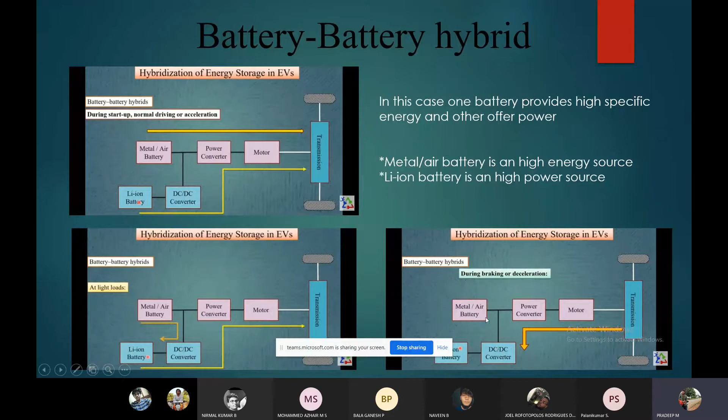Next, during deceleration, the metal battery is not rechargeable or not accepting power. The electrical motor and generator transfer kinetic energy into electricity to charge the high power energy source via a DC-DC converter. So from the transmission, it can be charged through the lithium ion battery through a DC-DC converter, but we can't charge the metal air battery in a deceleration condition.

Next, we are going to see the battery ultra capacitor hybrid. There is a combination of a battery and the ultra capacitor, and the ultra capacitor is a high power energy source. It can offer high charge and discharging power, but its energy density is extremely low, and the ultra capacitor has to work together with electrical batteries.

In addition, a two quadrant DC-DC converter connects the battery and the ultra capacitor source. The lithium ion battery is the primary energy source, while the peak power is delivered by the ultra capacitor source. The ultra capacitor source is recharged during regenerative braking from the lithium ion battery.

In acceleration mode, both are discharged to the motor, and it transmits to the wheel. In a light load condition, the lithium ion battery will discharge to the motor and also discharge or charge to the ultra capacitor.

In a regenerating mode, it will charge the high power energy source, which is the ultra capacitor.

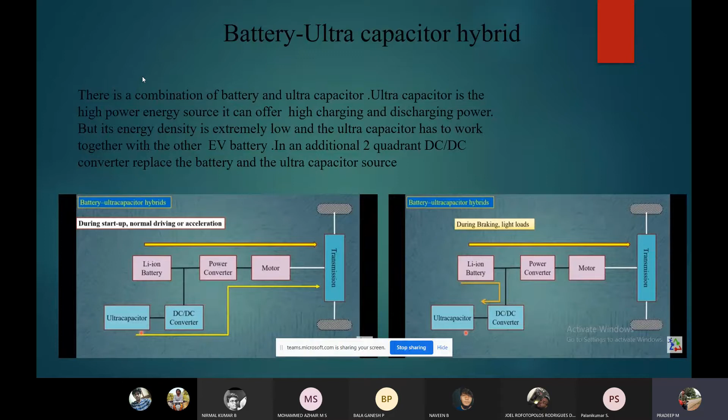Next, fuel cell battery hybrid system. It can offer outstanding specific energy, and it suffers from lower specific power, and has the incapability of accepting regenerating energy.

In the case of a fuel cell electric vehicle, it is generally propelled by the fuel cell battery hybrid storage system, in which the fuel cell stacks and the battery work together for efficient regenerative braking and high accelerating power. The battery operates in an SOC window of 40% to 70% in the fuel cell battery hybrid collaboration, in which the battery can be purposely selected to compensate for the shortcomings of the fuel cell.

In fuel cell systems there are three types: first, proton exchange nickel metal hydride battery, and proton exchange fuel cell lithium hybrid. These are typical choices of battery having high specific power and rapid rechargeable capability. The ultra capacitor should be improved to such a level for specific high energy.

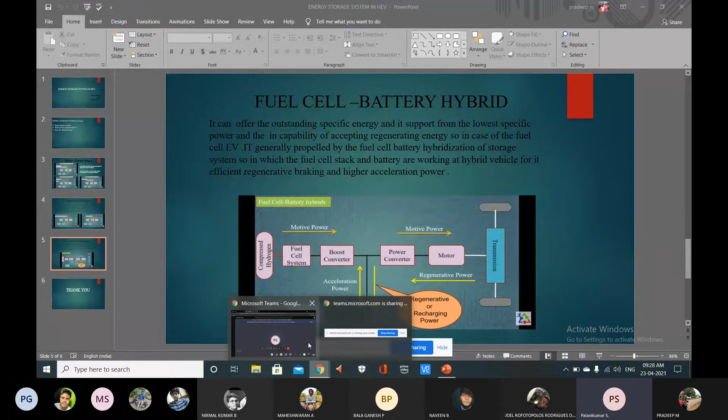Okay, Pradeep. Nice presentation. Thank you.

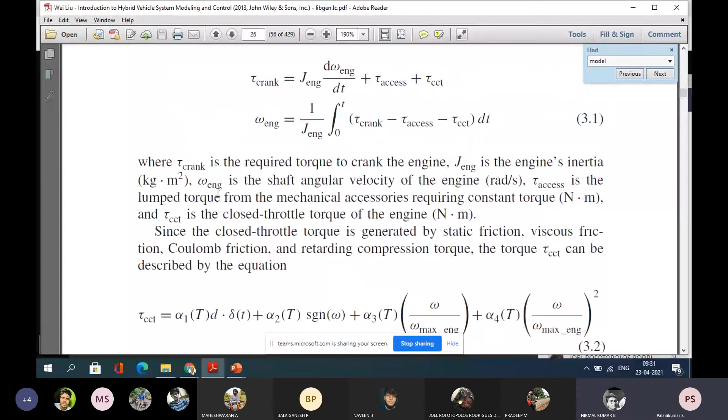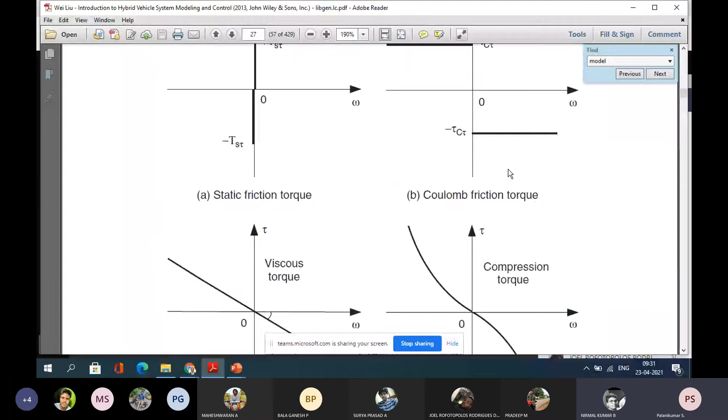Okay, so first, completely internal combustion engine. What is an internal combustion engine? Suppose a crankshaft. The engine is there, no? Gasoline engine. Yes. For each gasoline engine, what is the corresponding mathematical equation? They'll explain. And slowly they'll go to the characteristics, how those characteristics can be represented using equations.

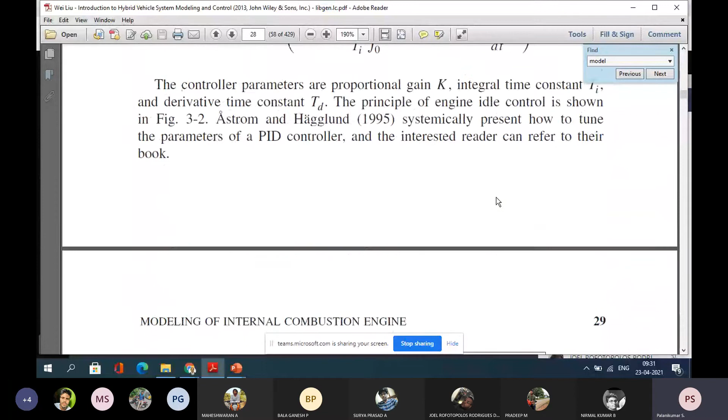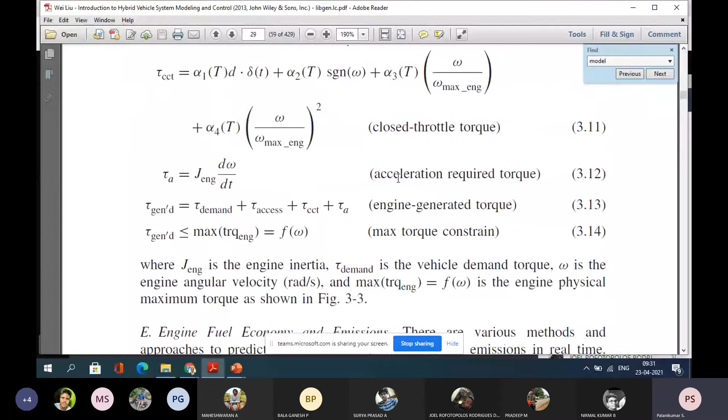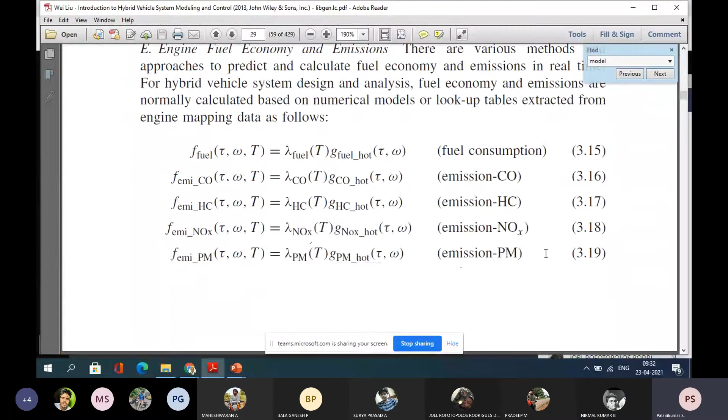Then they'll start with the engine off, and when the engine is in idle condition, when the PID controller is present. So they have generated engine idle and speed control, that is the speed control principle. And what are all the equations? Closed throttle torque, acceleration required torque, everything, finally a mathematical model. And fuel economy: finally how to calculate the fuel consumption, emission of hydrocarbon, emission of nitrogen oxides. These are all the things they'll take, and finally they'll have a fuel consumption and emission calculation loop.

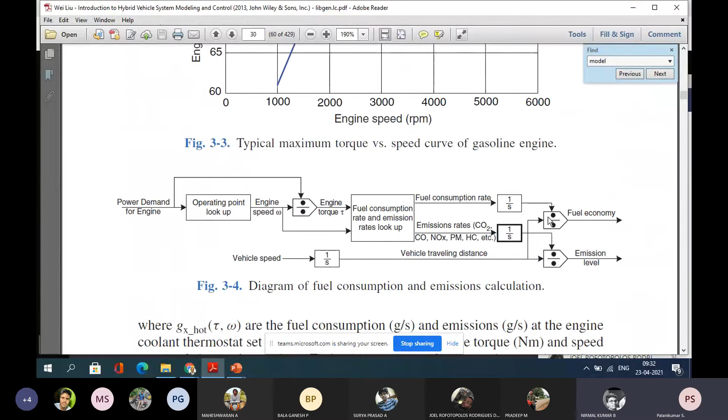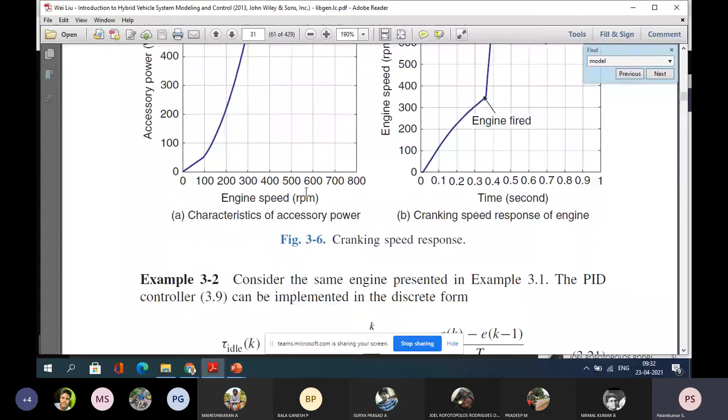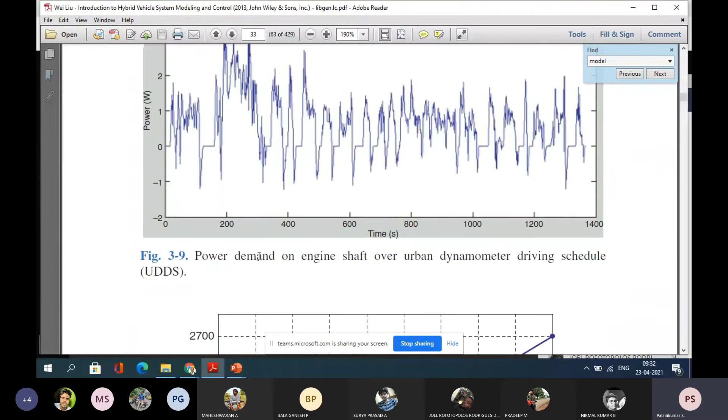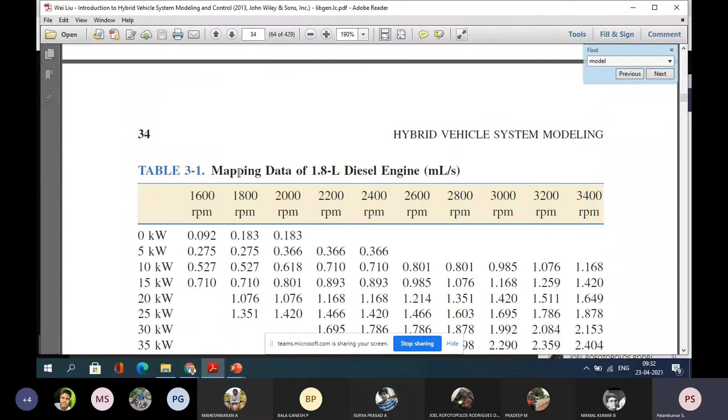Then they did one problem. After that, how engine cranking can be modeled. For that, how the engine speed and time is taken, and they have done another problem. Likewise, electric motor: how the required power is found. First, they'll have a driving schedule of a particular one, as well as engine operating power. After that, they converted it. They have a data mapping of a 1.8 liter diesel engine with how much RPM, how much kilowatt are required.

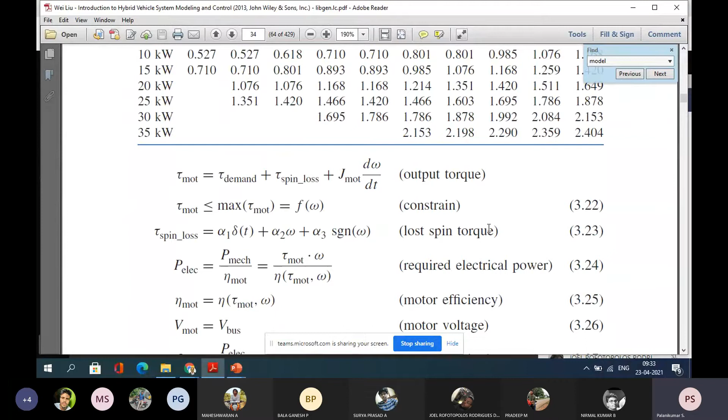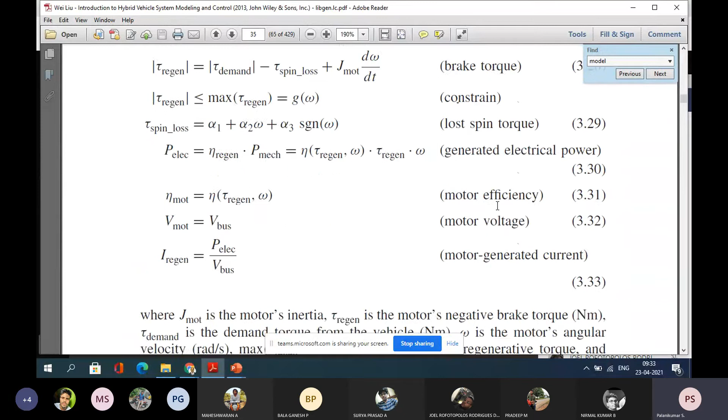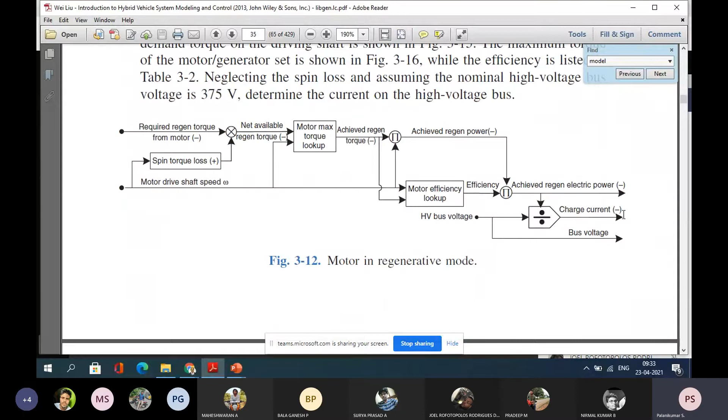So from that, motor torque, output torque, they'll convert to mathematical modeling constraints; motor efficiency, motor voltage, everything they'll convert to equations. Then they'll implement the equations in the motor and propulsion mode. Likewise brake torque: motor efficiency, motor voltage, how to calculate, and they have done it on a small motor in regenerative mode. During regenerative mode, how we can predict and get the exact value of power. How much torque is given, how much drive shaft speed, everything taken. Finally, how much will be the bus voltage, how much will be the charging current, so they can make it a closed loop.

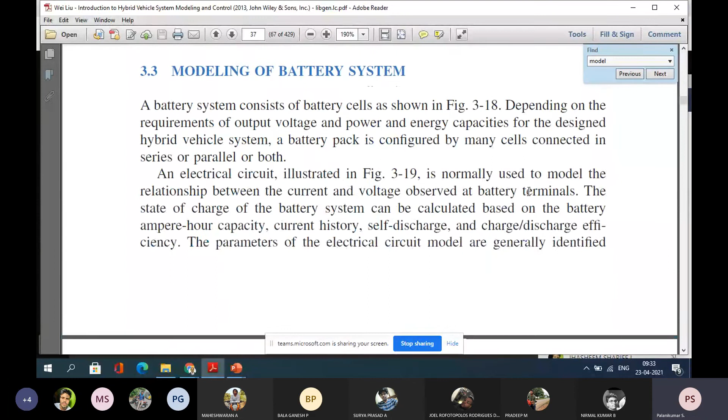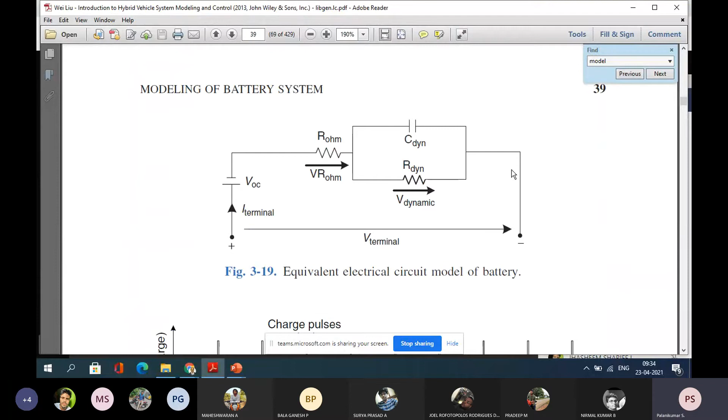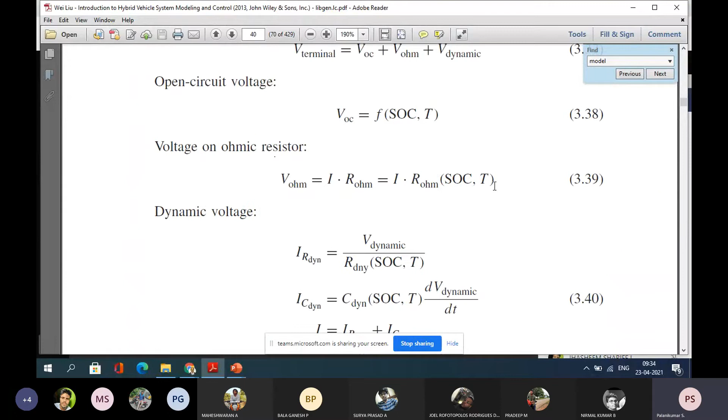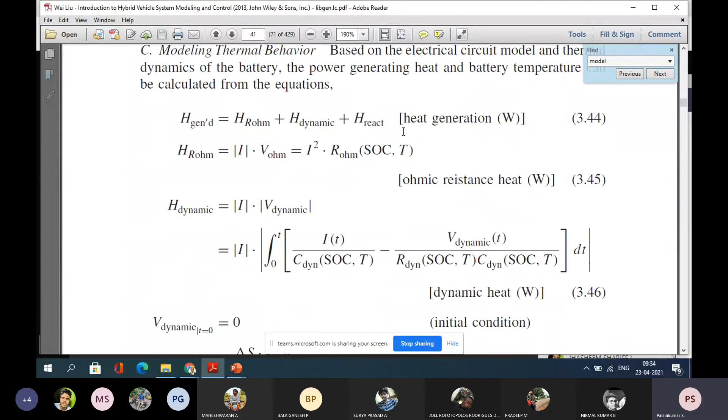Then they will have drive cycle and battery system modeling. For each motor generator set, how much Newton meter, what efficiency will be generated. How a battery can be modeled, charge pulses, charging and discharging; they have given a complete model and equations in terms of terminal voltage, open circuit voltage, ohmic resistor voltage, dynamic voltage. Everything mathematical modeling they have done, very good, from page number 25 to 60, and thermal behavior of the battery. Only thing is you have to understand. So I think 2-3 hours of extensive study and preparing slides is very important.

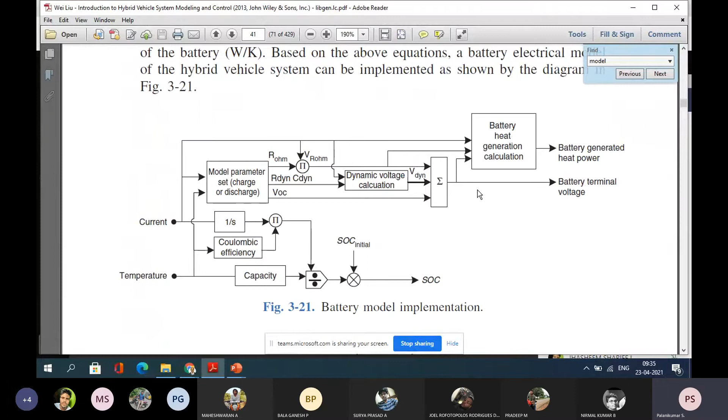Finally, battery model. If current and temperature are given, how much is the battery generated heat power, battery terminal voltage, what is the state of charge? By providing these two pieces of information, how much current I need and the present temperature, I can predict how much heat will be generated in a battery, the battery terminal voltage, and the state of charge. They have arranged all the mathematical model equations so I can get the final output. This is what is called battery model implementation. I think you are able to understand.

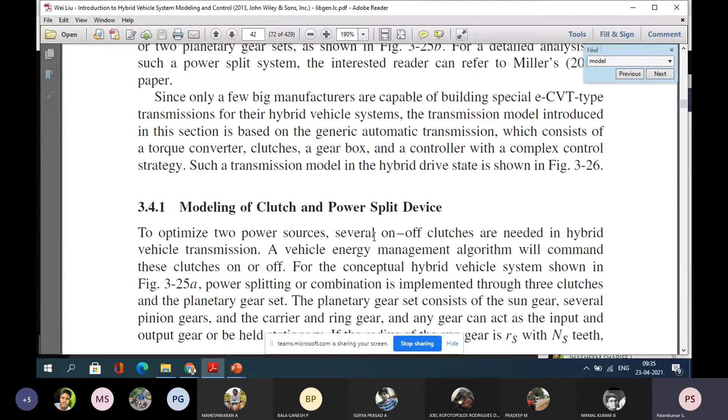Yes, sir. Okay, so likewise they have given examples, and transmission system, modeling of a transmission system. From tractive force generation to how, using a clutch and power split device, we can do that at different percentages of SOC. And they are governed by the equations. What's the equation?

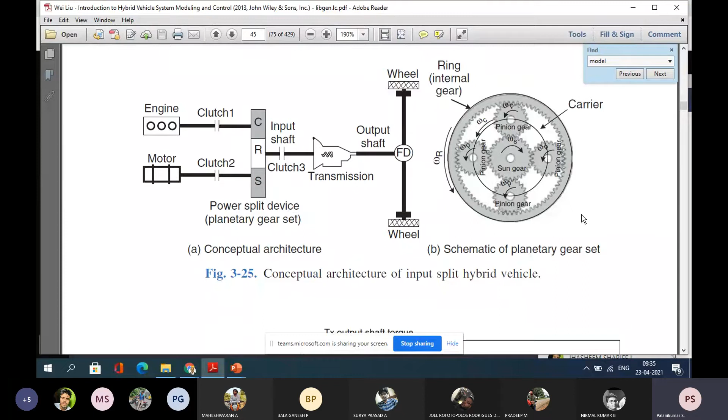And how is the conceptual architecture, how the power of engine and motor is given using a clutch arrangement, and how the transmission occurs finally in a differential gear, final drive gear, and how the planetary gear is working. And finally, the way they have put it in all the mathematical equations, they place it here, and automatic transmission hybrid drive states.

Clutch control, engine power, engine speed, engine inertia, motor power, motor speed, motor inertia is given. Finally, if I'm given this detail, everything is processed, and I will get how much is the output shaft speed, how much is the output shaft torque, and how much is the output inertia. So I can get it.

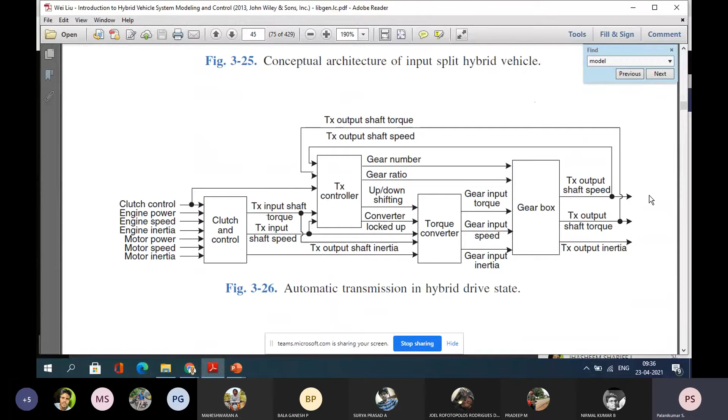Because as a result of the mathematical model, we are going to implement it in simulation. If you want to implement simulation, I should create a Simulink diagram. So each clutch control power was earlier mathematically modeled, likewise torque, shaft speed. Everything is mathematically modeled, and finally I will get three outputs: how much is the speed, how much is the torque, how much is the output inertia. It is given very nicely.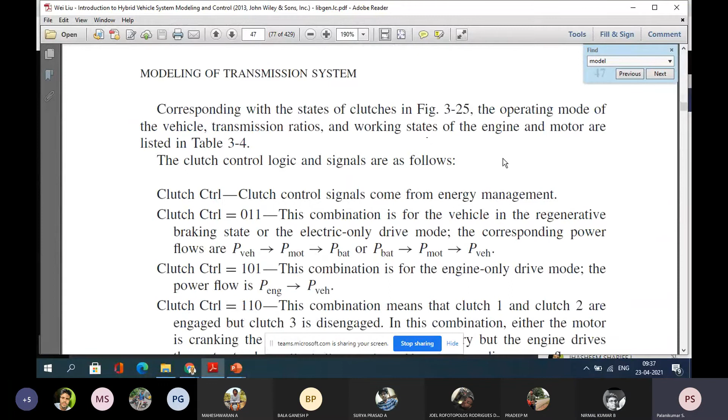I think this book also I have uploaded. So clutch control, how it is happening, how the power flow is happening, everything is very neatly described. After that, individually, motor speed, motor torque, motor inertia are given. After that, what will happen to shaft speed input, what will happen to engine shaft speed. So this is the model diagram.

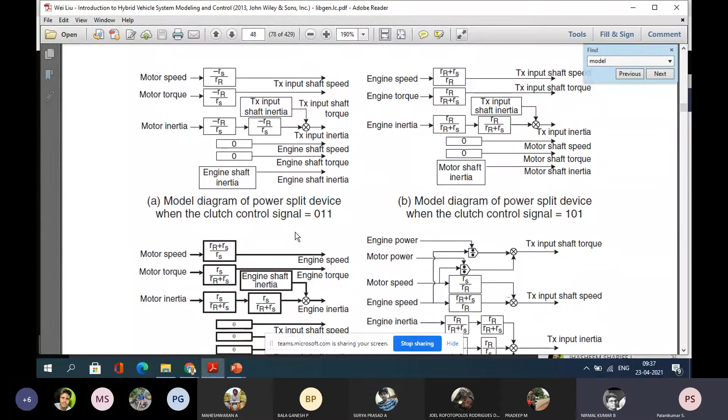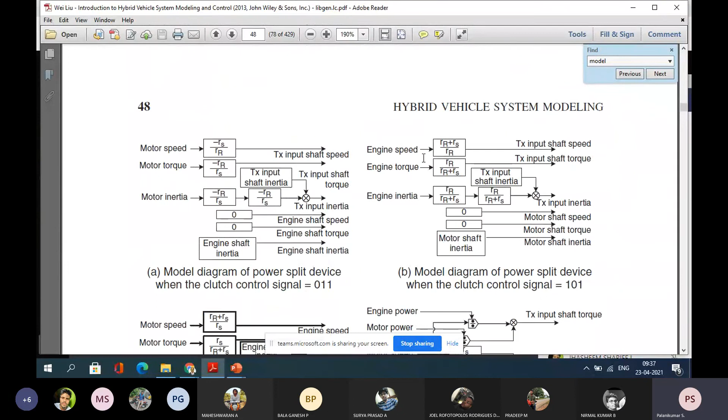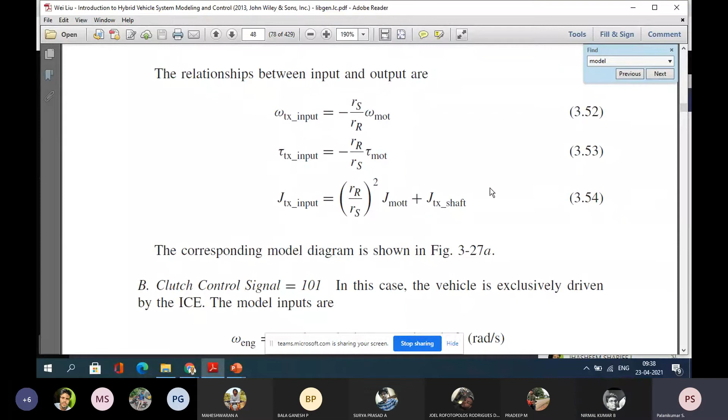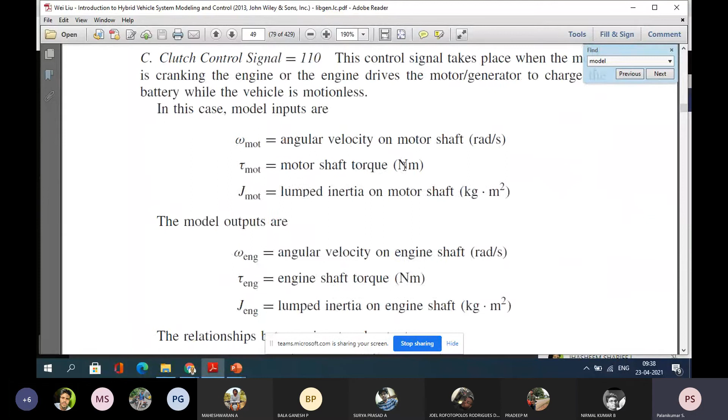Of clutch control signal 011, here is the 011 clutch control, 101 clutch control. We are going to name it and describe the operation. It is completely in the program, and that is AICTE conducted. That program mainly is going to create engineers with this knowledge, after the fundamentals: starting from engine and motor, and when coupling this power in a powertrain using a clutch arrangement, how it reaches the vehicle as a tractive force. They are going to elaborate on that. Very good material is available.

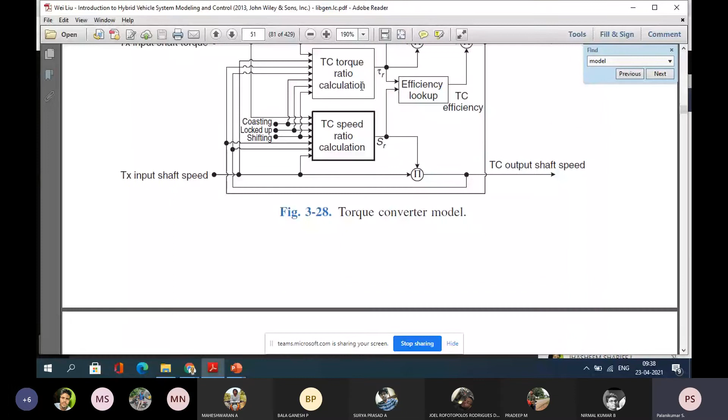So completely, whatever the factors, everything has a formula. The torque converter model also is there. By the input given, I can get the shaft torque and shaft speed, considering the inertia of the vehicle, how much will be the output shaft torque and output shaft speed. In between, I will do the torque ratio calculation and speed ratio calculation. Finally, added with the efficiency, I will get the required amount. So this is how I'm designing.

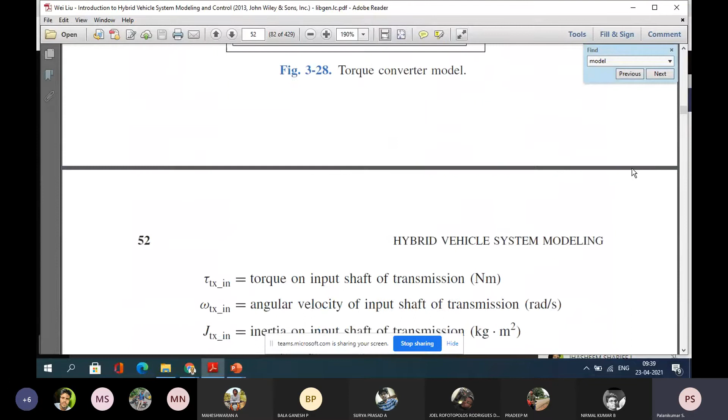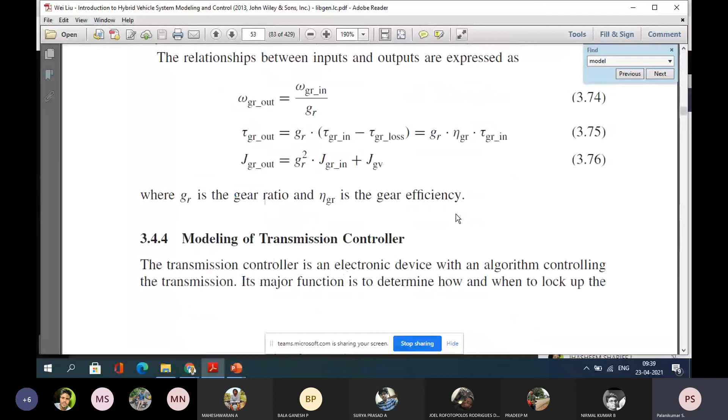After this, the digital output is converted to analog and given as a signal to the concerned engine and concerned motor, so I can get the required amount of power. A complete mathematical model and its notations, everything is given. Even the gearbox is modeled: modeling of gearbox, how to do that, modeling of transmission controller, how to do that. Everything is very elaborately given.

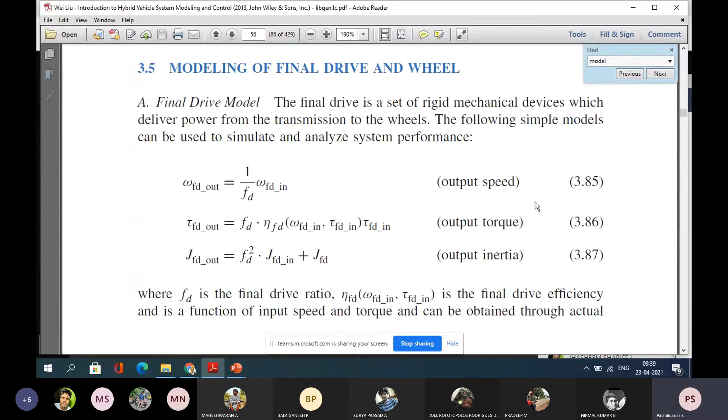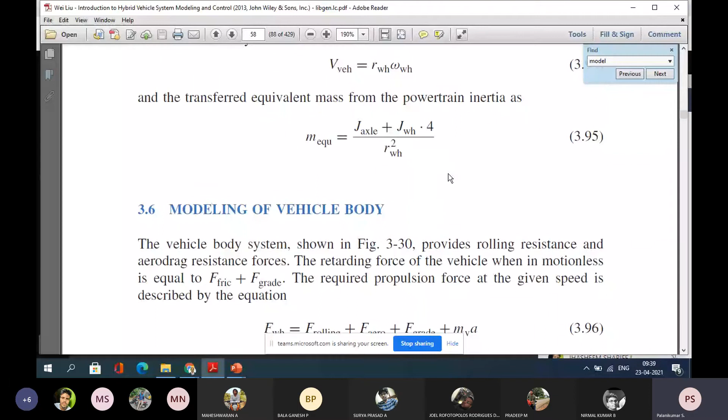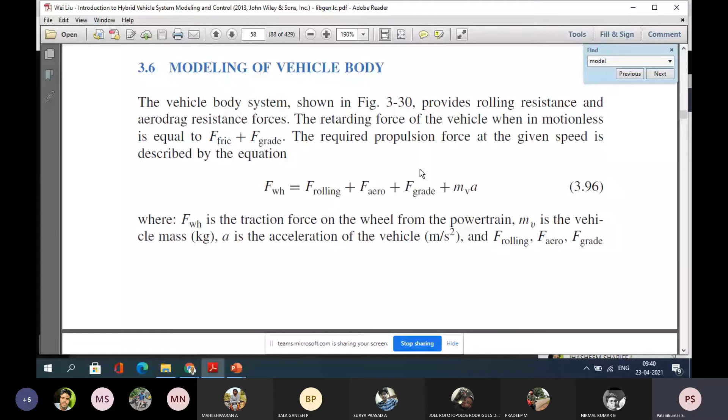At least, leave the mechanical part. You can concentrate on motor, battery, and final powertrain, final drive and wheel, and you can explain how this mathematical modeling is helping to understand and simulate. Mainly we go for mathematical modeling because before going for any prototype, we want to know whether the design parameters are working properly and I'm getting the desired output. That is a very important reason why we go for simulation. Simulation software is actually a very important gift.

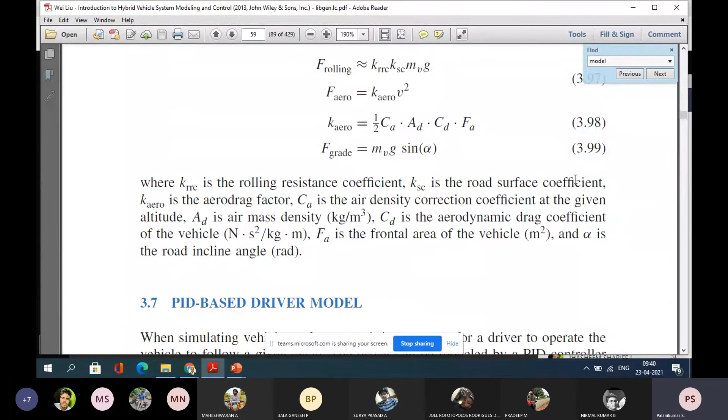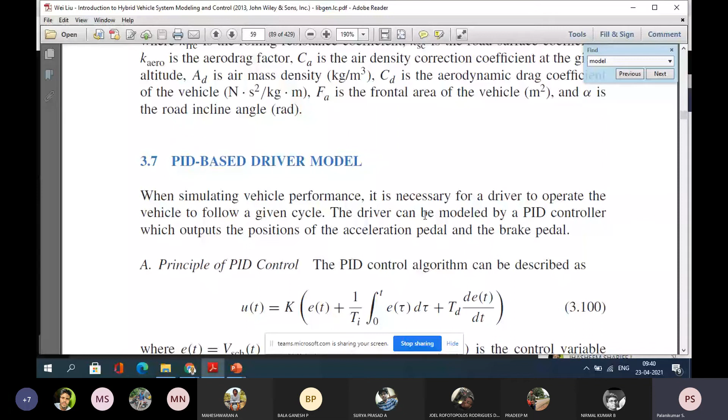Otherwise, even if you have done everything on paper, calculations and all, finally we have to go for a prototype. But obviously here also, after getting simulation results, we have to go for a prototype, because as I explained one day, it is complementary only. Some of the major issues arise only in the practical case, which we neglect because they cannot be characterized in a mathematical equation. Some things can occur only in the real practical system. Other than that, the remaining we can predict. So obviously any simulation output, any mathematical outcome, is complementary only.

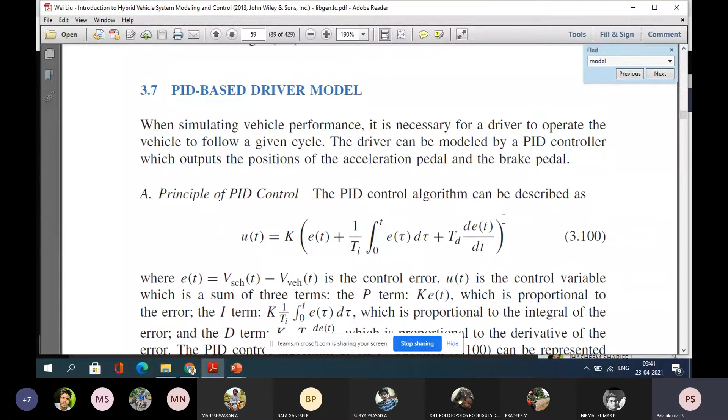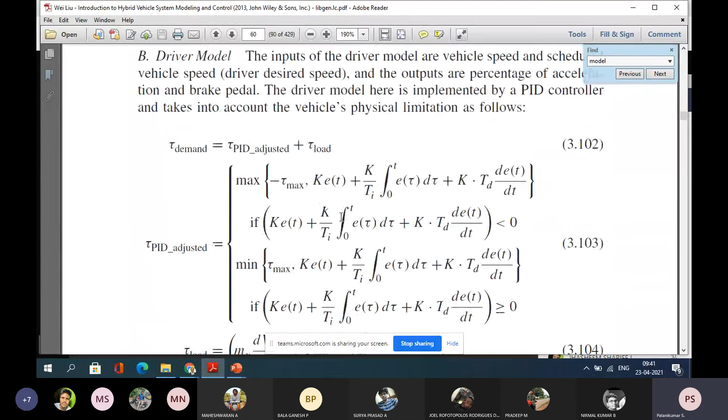It is complementary to the real-time models only. So that way, if you take that, you implement PID control finally as a driver. So how is it really implemented? Finally they'll come out with how much is the demand, how much is adjusted, and how much is the braking power, how much is the acceleration power, everything you will finally come to know.

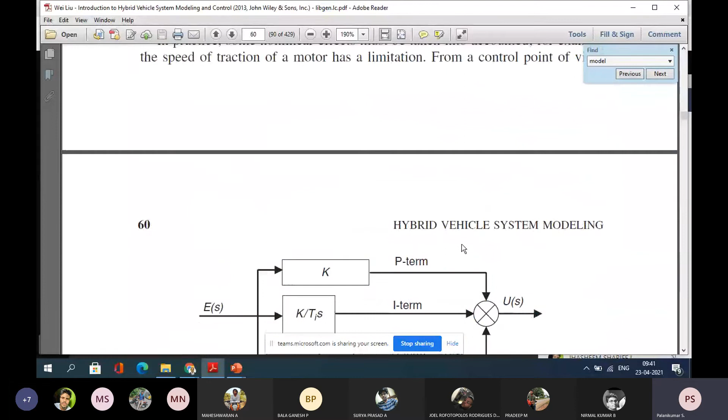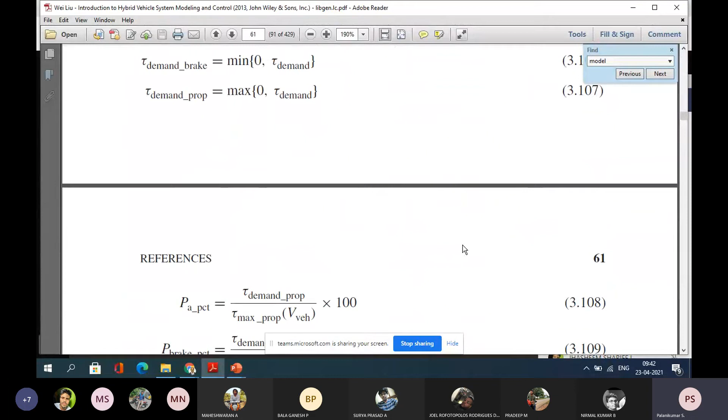So by simply providing the details, starting from the engine parameters and motor parameters, battery parameters, working condition and drive pattern, everything, if I am able to feed it to the system, finally I will get a desired output. How much is the shaft speed, how much is the shaft torque, how much is the inertia torque, inertia speed to overcome that, and how much is the tractive force that can be generated. So in terms of numerical values you are able to get, then I can go for real-time fabrication of these things. So that is the way the mathematical modeling can be converted.

Yes, yes, nothing, sir. Hello.

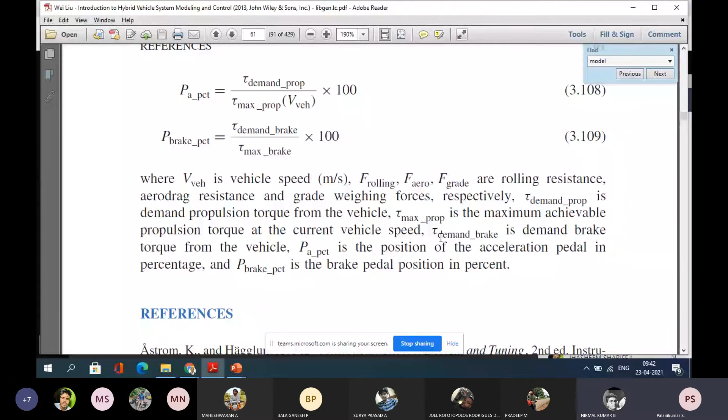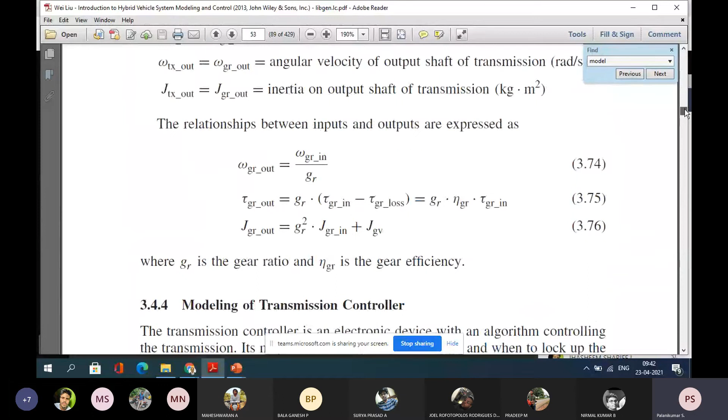I think that's really the challenging thing. I think this is somewhat advanced, I can only say. So the only thing is, slowly and gradually you have to start understanding. Have you worked on any Simulink development using MATLAB? I think you may not have worked on it. Maybe only for power electronic circuits you may have used Simulink, but this is to develop a Simulink block.

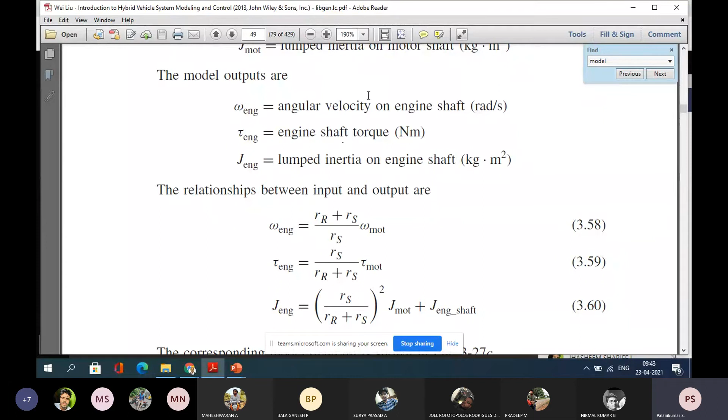There everything is readily available. Suppose I have a device, suppose a power source is there, the only thing I have to do is drag it and it will come and paste. If I double click that, I am able to set the input. It will show all the input parameters and the output of the block. That's nothing but mathematical equations. But here, after developing this mathematical equation, we are going to implement the same in the blocks and we are going to save them.

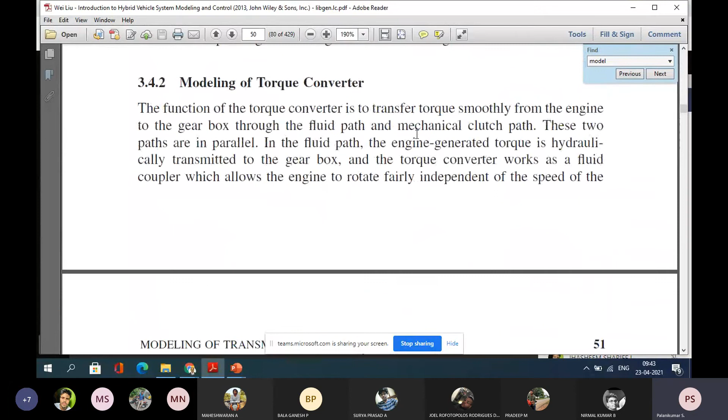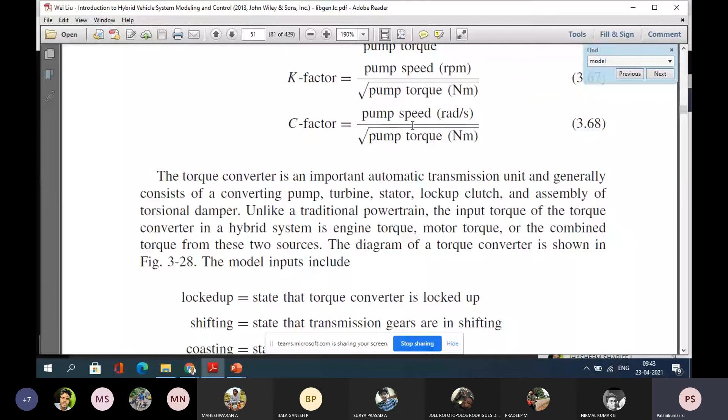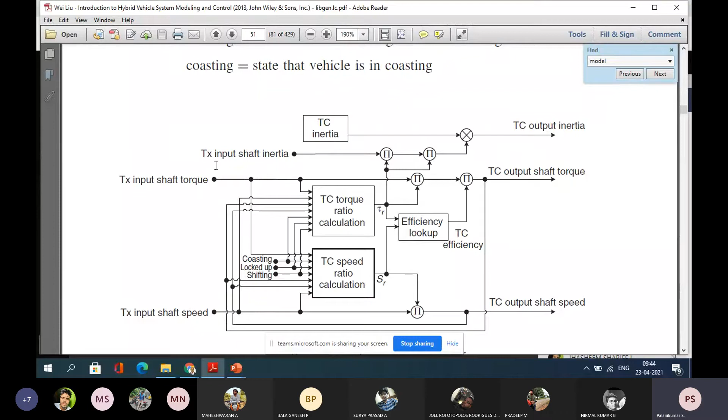There is Scilab, I think you may have that software, Scilab, SCI. It is similar to MATLAB, but it permits creating such a mathematical model, and we can put it in a block like that, a box in which if I double click, automatically it will show what the input is and what the output is. Likewise I have summation points and added points, everything is available. Apart from that, these things only I have to create, and once I have created and stored them and made a Simulink diagram, by providing this input I can get an output. So after the final implementation, I can get what I want.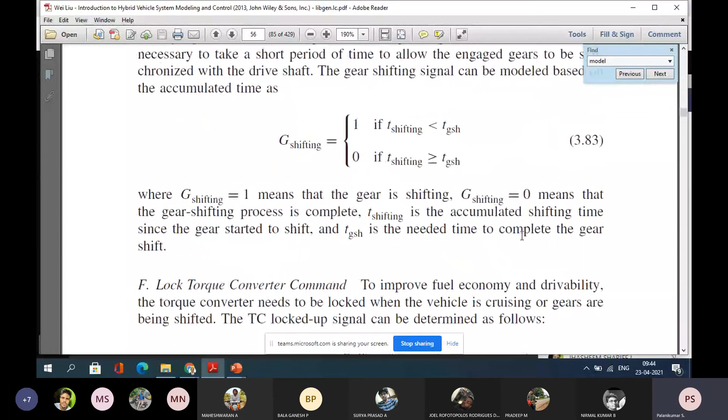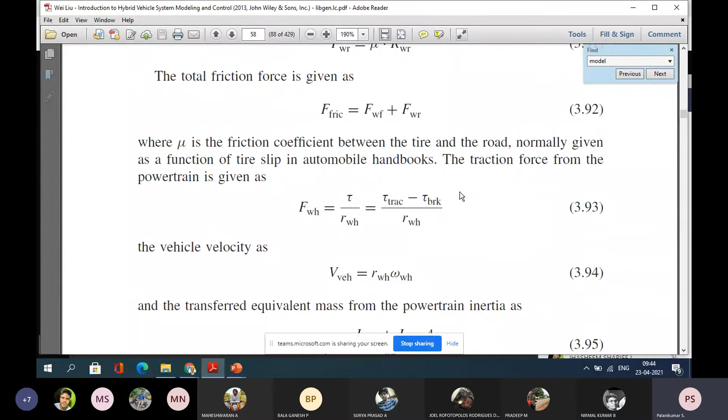Is it possible, Nirmal? Can you work on this and present? Yes, sir. I will try, sir. At least some 20 slides. You can try. Suppose you are not able to understand the engine part, the crank cycle, how much mechanical power is developed, leave that, and we can concentrate only on motor, battery, and power drive, and finally how the final implementation looks. Okay, sir.

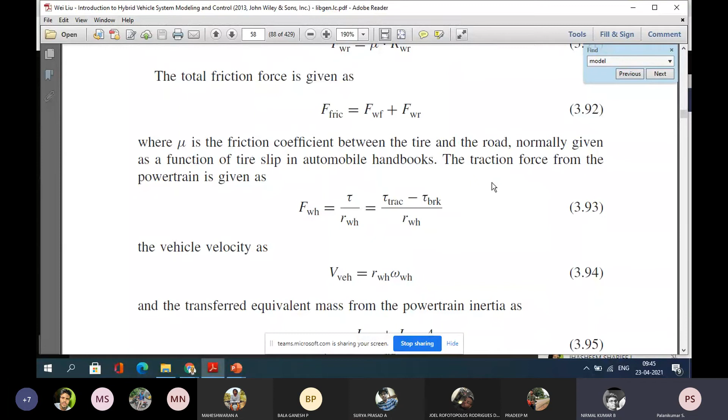Okay. Any other clarification? Others? Any clarification? Okay.

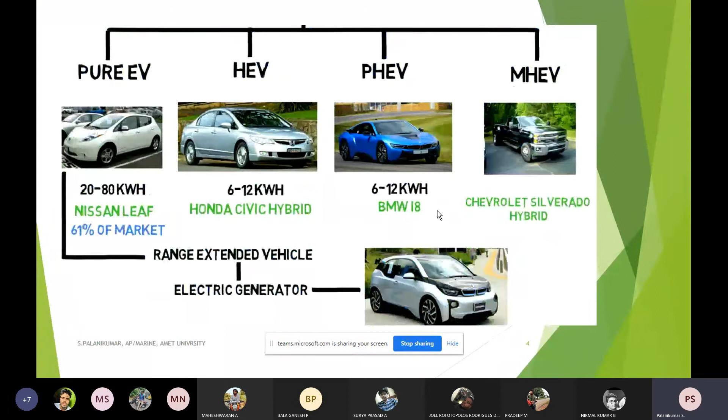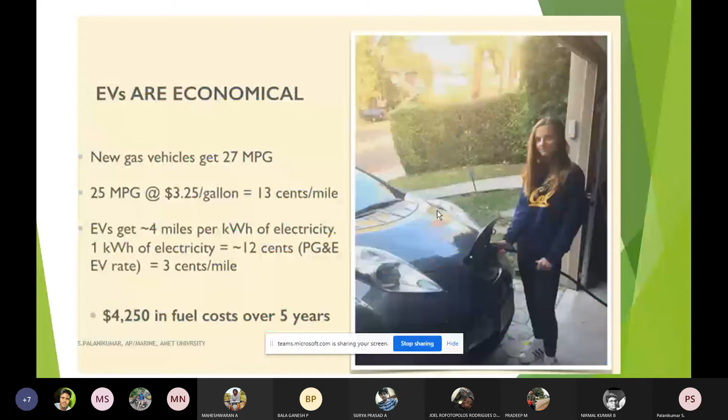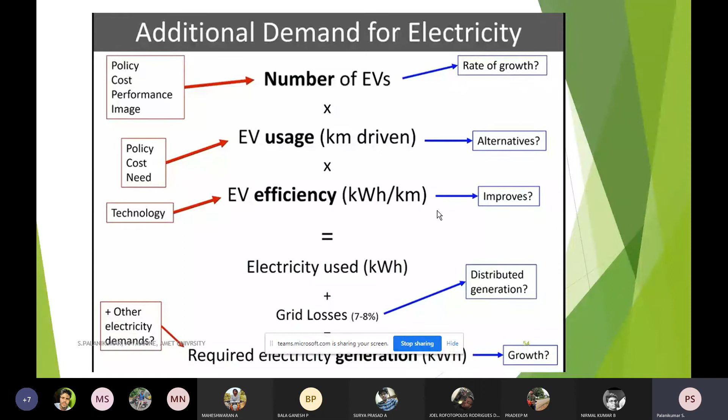So yesterday, regarding retrofitting, we have seen, I think Maheshwaran presented something. Apart from that, these are all the basic concepts, you know that, and battery pack and all. I think these types of issues we can also take when going for retrofitting. How many EVs or HEVs and their usage? How much electricity will be needed? Additionally, we can discuss charging and peak demand power, constraints on the local transformer, how it will be affected.

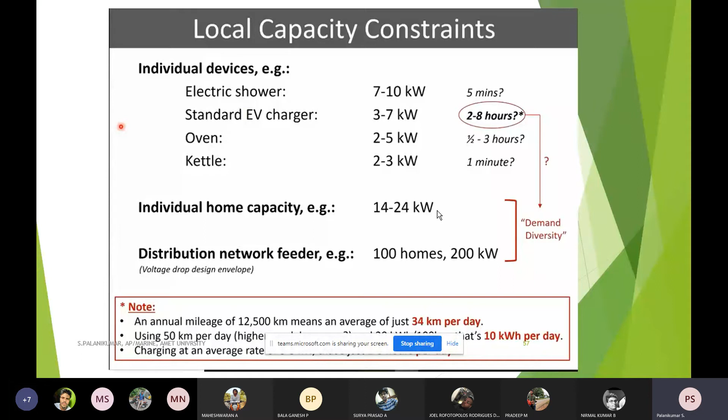After that, mainly when we talk about EV or HEV versus petrol, how the fuel economy is improved along with emission control. I think I have explained these also, so you can include that in your presentation. Finally, even when going for a hybrid electric vehicle, we use electricity for charging. That electricity in turn is produced in generating stations using 70 percent fossil fuels. Maybe only 30 to 40 percent from other power plants. In India now, 60 to 70 percent of electricity is produced using thermal power plants, mainly by burning coal.

Remaining only hydel. Then we can go for other energy sources: diesel power plant, and obviously nuclear power plant. Then we go on for renewable energy sources such as wind farms and PV panels. So of how much electricity I'm using for charging my battery, 70 percent is going to come

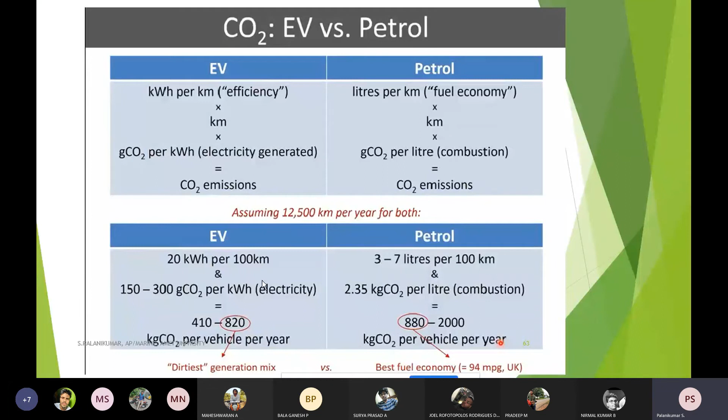So this is a very important calculation or slide, assuming 12,500 kilometers traveled by a vehicle, if it is pure petrol or a pure electric vehicle. I think you can take this also. So, especially retrofitting as a solution in the Indian context, we have already seen that.

If you look closely, compared to India, other nations spend only a very small amount of their per capita income on fuel. As you are aware, India is one of the Asian countries selling fuel at a very high rate. In neighboring countries like Sri Lanka, Myanmar, and even Malaysia, Singapore, even Pakistan, we can take.

The fuel cost there is very low, half of our price only. But the Indian government puts taxes. So if you consider fuel price relative to per capita income, in India it is very high. So it is not only to contribute to the CO2 emission cut, we also have to decrease the fuel price burden on per capita income. For that also, retrofitting technology is very useful.

It addresses customers' needs: how much they want to cut down, and the financial goal. Mainly it has a financial goal and performance sustainability. The same way, it will give you fuel economy and address vehicle end of life. Conventional vehicles running at the end of their life show very poor performance and very bad fuel economy. In that case we can convert them, and it also contributes to society's needs.

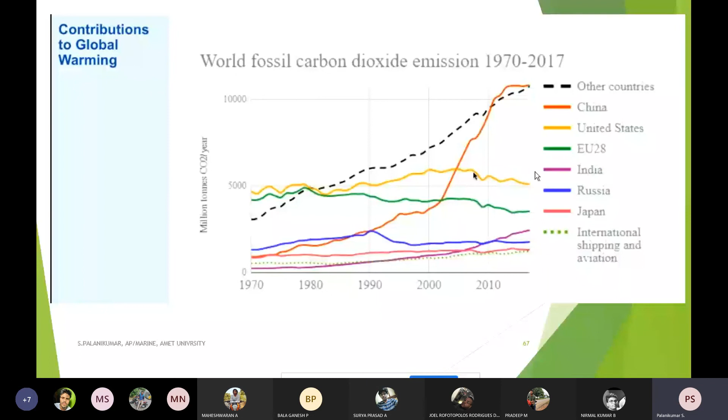So one study states why Delhi, Mumbai, places like that, are having more deaths, casualties, these days because of its outdoor air pollution, so that can cause virus transmission very fast and actively. Maybe that's the reason for mutation also, why the mutation happens in Bengal, triple mutated, they're telling. So maybe due to the pollution, in order to survive, the virus itself is getting mutated.

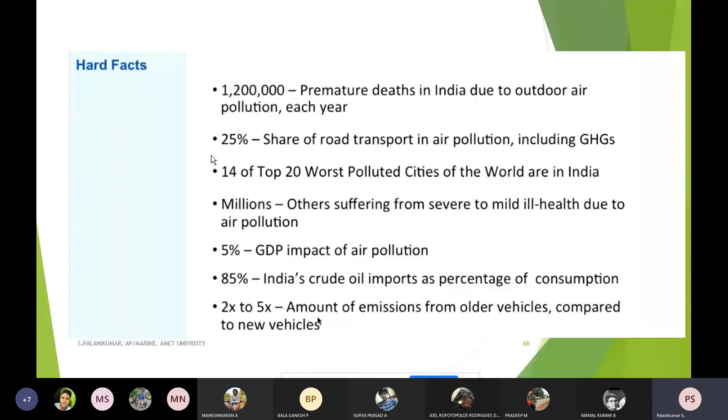As far as the retrofitting technology, as I already told, there are two different ways: hybrid electrical and full electric vehicle. This retrofitting technology is a recognized one, and it is regulated by the AIS, AIS-123 part 1 and 2. In hybrid electrical vehicle, mainly torque assisted system, starting from torque assisted system up to 70%, 80% of hybridization is there.

Whereas if you want to convert an existing Maruti 800 or Alto 800 vehicle, we can able to convert it to full electrical, completely removing all the engine and gasoline parts. Only we are going to have a battery pack, power modulators, and motoring. I can have such a way, that is also regulated by AIS-123 part 3, giving guidelines how to do that, and finally we can get an endorsement.

So obviously, any vehicle that we are going for, whether I'm fitting a kit along with the gasoline, or removing that completely and going ahead with new conversion to electrical vehicle power propulsion, I have to get an endorsement. If you follow this AIS-123 part 3, whatever guidelines are said, they'll give an endorsement. That is what commercially they are doing outside also.

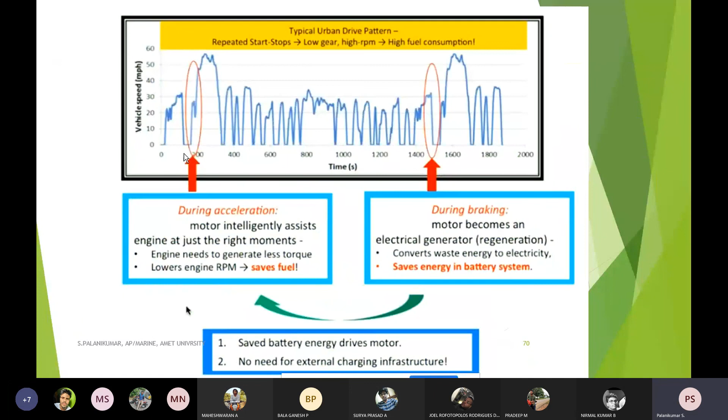So this is about drive pattern study. This and all, you know what are the components. So being a hybrid electrical vehicle, everything we have already studied.

Okay, I think yesterday Maheshwaran, Maheshwaran only did retrofitting, am I right? Yes sir. Yes, I think you can add some more points related to that, and you can enrich your slides.

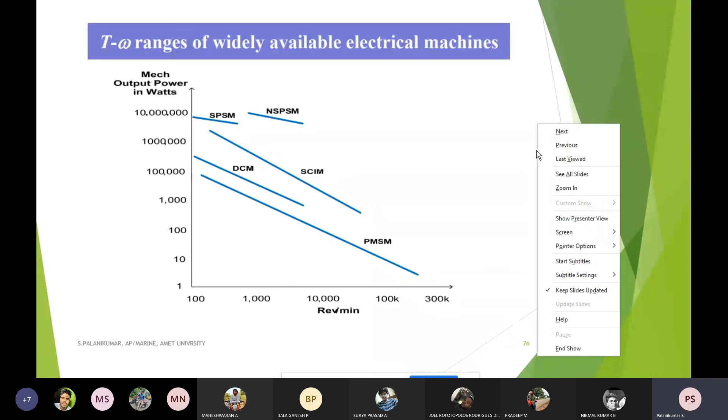What about tomorrow's Joel? Has he got ready? I think Joel already said, he's prepared slides. I think you can expect a lot, you can expect a very good presentation, provided he prepared well and presented very nicely. As far as presentation is concerned, he created a very nice presentation about Tesla's model. So what about Hazim? Hazim?

Hashim Sharif? Hello? Hashim? Not in call, he's there, but what about Joel, okay.

Tomorrow, okay, so 10:30 to 11:30.